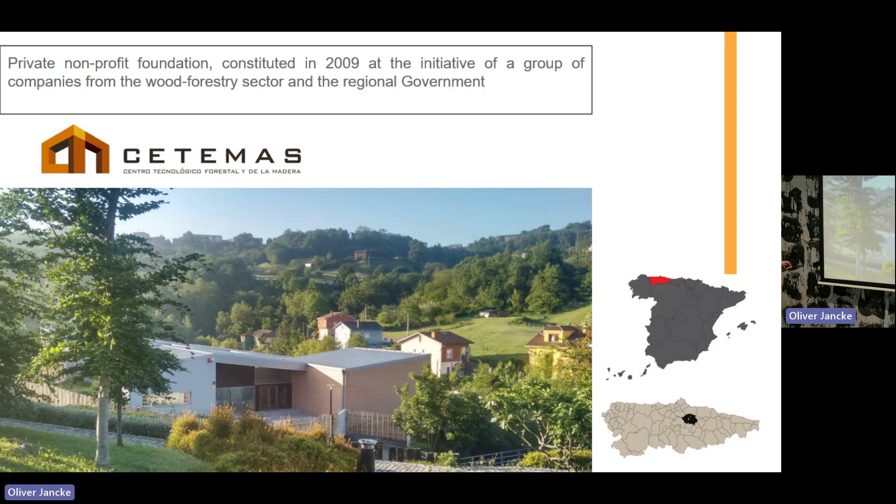We are a private and non-profit foundation created in 2009 under the initiative of a group of important companies in the forest and wood sector in Asturias and other regions, and obviously under the support of the regional government of Asturias.

We are around 22 people with different professional profiles. We have forest engineers, chemists, biologists, chemical engineers, and every year we have between 2 and 6 students of different levels.

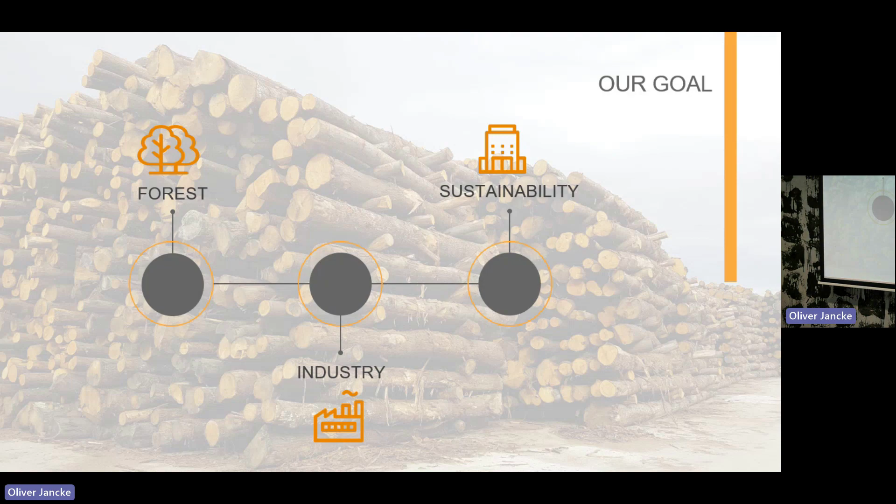Obviously we work across the whole value chain from the forest to the final product. We work, for example, in forest genetics and in the characterization of wooden windows, so we cover all the value chain.

We can divide our work into 5 main areas or work lines: sustainable forest management, forest planning, geomatics, sustainable materials and construction, and bioproducts.

In sustainable forest management and forest planning, we work with different species present in our region and in the north of Spain in general, like Pinus pinaster, Pinus radiata, and of course the very important hardwood species for us, like chestnut or oak.

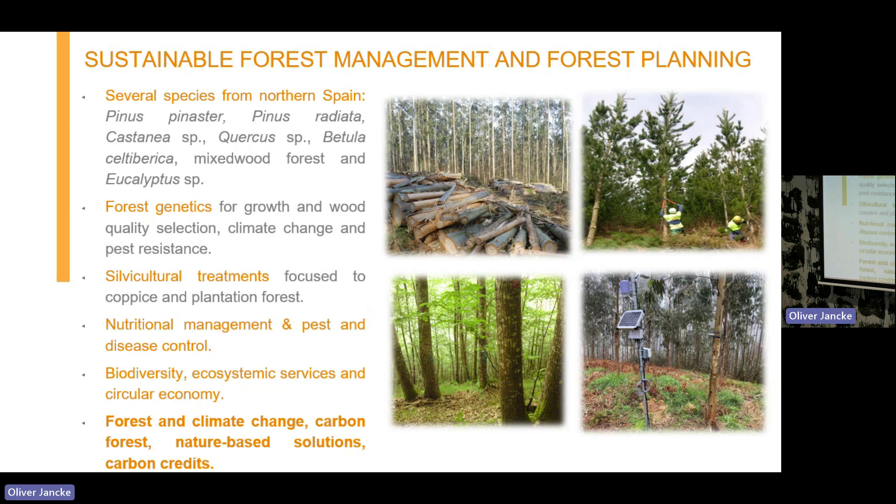We work in forest genetics and in research and innovation in silvicultural treatments, in the implementation of new technologies, forest management, machinery, and the evaluation and optimization of forest works, and obviously in the relationship between the forest and all the carbon issues that are so important nowadays.

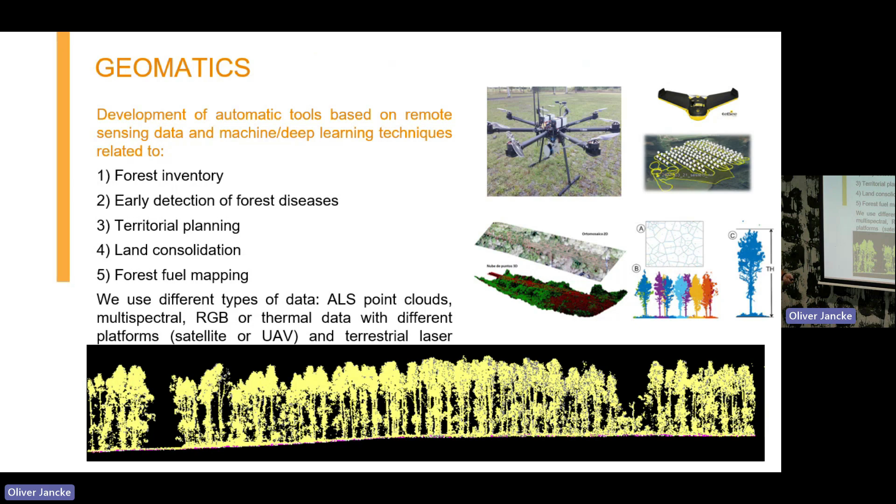In the area of geomatics, we have different types of drones with different technologies that we use to develop automatic tools based on remote sensing for forest inventory, detection of forest disease, territorial planning, land consolidation, and forest fuel mapping. This is a very important line for us at CETEMAS, and one of our main works.

Related to sustainable materials and construction is the theme more related to Innovagood, of course. It's the area where I am working. I can divide it into structural timber and construction, and wood technology.

In the first one, we work on physical and mechanical characterization of any type of wood-based product. We use NDT technologies and dynamic analysis, even in industrial products and structures, for on-site and industrial quality control.

We develop projects to improve industrial processes and optimize the capacity of companies in the first and second transformation of the wood industry, and we do inspection and diagnosis of timber structures.

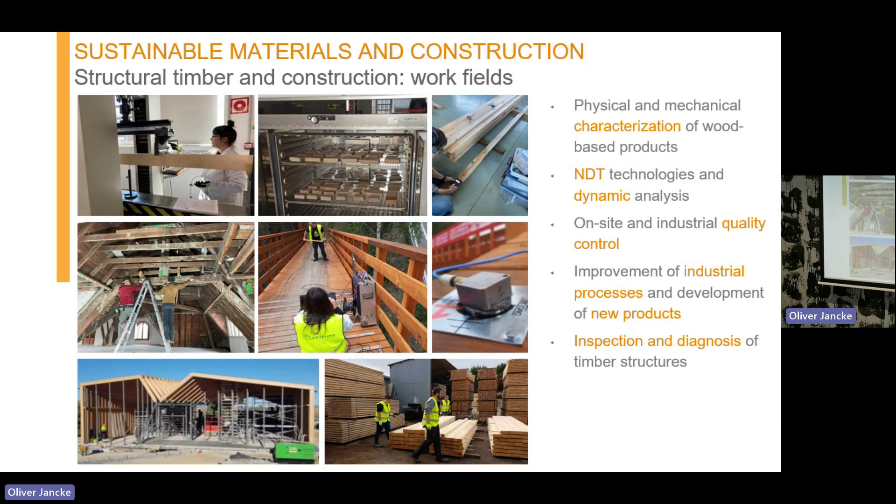In the last few years, we have been actively working on the inspection, evaluation, and inclusion of new technologies in the inspection of wooden heritage in Spain. In Asturias, this is very important for us.

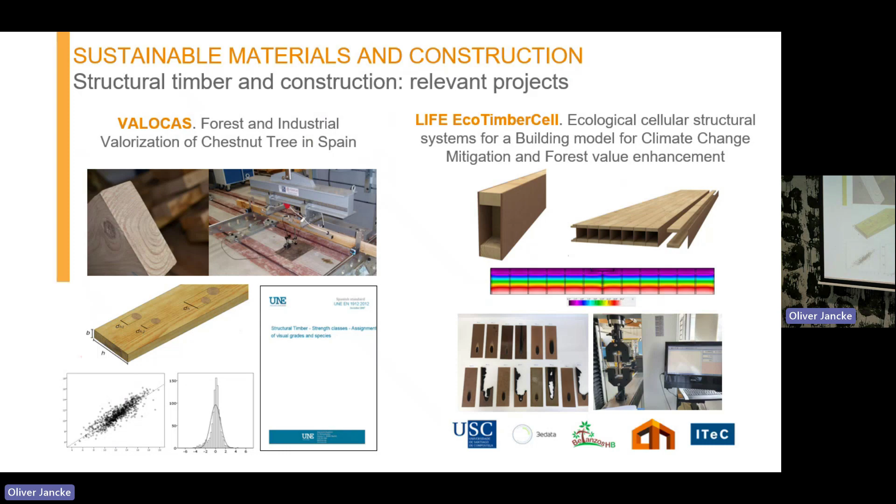Well, two examples of two projects in this area. For example, we did maybe 10 years ago the mechanical characterization of Spanish sawn chestnut timber and its inclusion in the standard 1912. More recently, we finished a project with other partners on the development of new structural systems and the evaluation of mechanical properties, thermal properties, behavior in fire situations, and the behavior of different kinds of adhesives, trying to look for a bioadhesive, so different approaches.

And in the field of wood technology, we work on a lot of different tests and approaches, the physical, chemical, and functional properties of coatings, treatments, fire behavior, durability, tannin extraction, all of these things. Obviously, with adhesives in the carpentry industry.

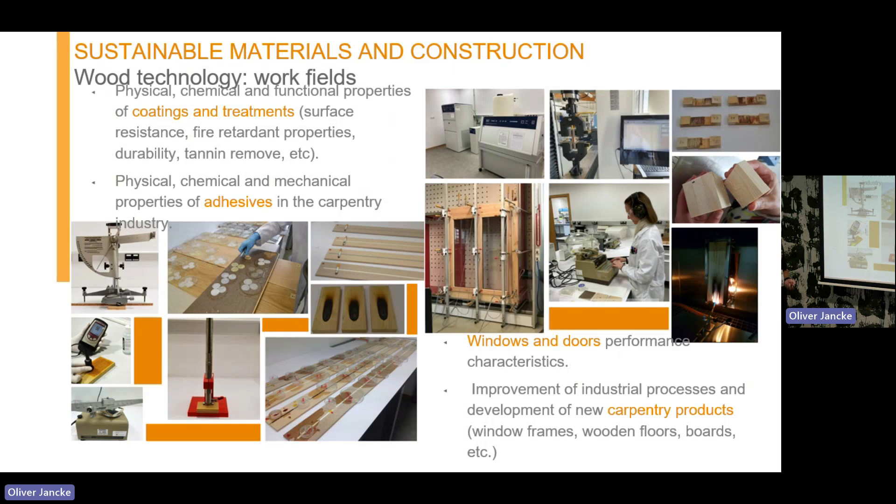We evaluate and work together with companies on window and door performance, the improvement of thermal and physical performance of wooden windows and mixed windows, and the improvement of industrial processes and development of new carpentry products. Especially, we work in wooden flooring and windows.

In flooring, for example, with the project of thermal efficiency improvement study of high quality wood flooring for radiant floor. Another example is the development of sustainable coatings and treatments for the surface resistance and aesthetics of flooring.

And in terms of windows, we work with a high number of companies in the north of Spain, evaluating all of the important parameters in a window like permeability, thermal behavior, all these things.

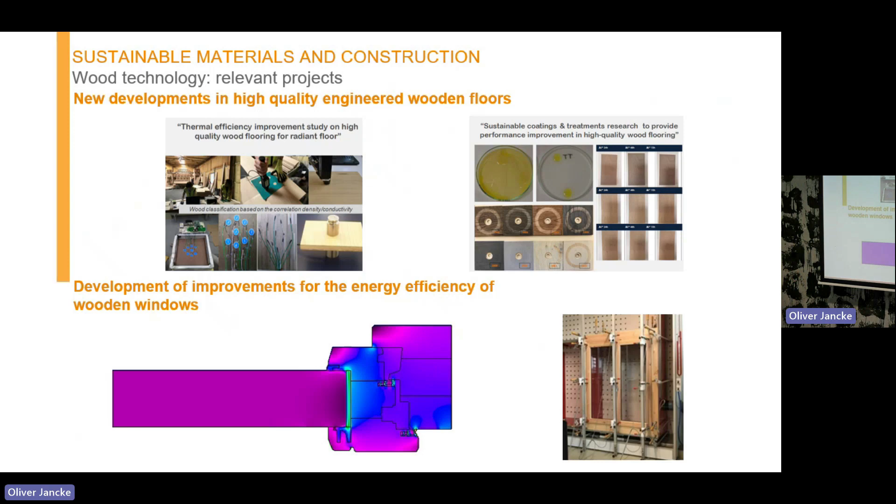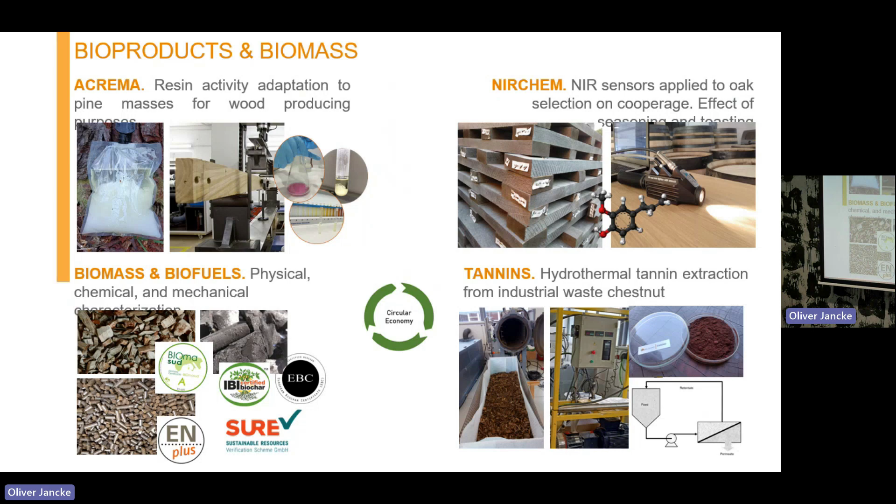The characterization in a physical, chemical, and mechanical way of biofuels, and the extraction of tannins from chestnut waste or from chestnut sound timber. This is a very potential and commercial way to use in other sectors, and it's a very important future line.

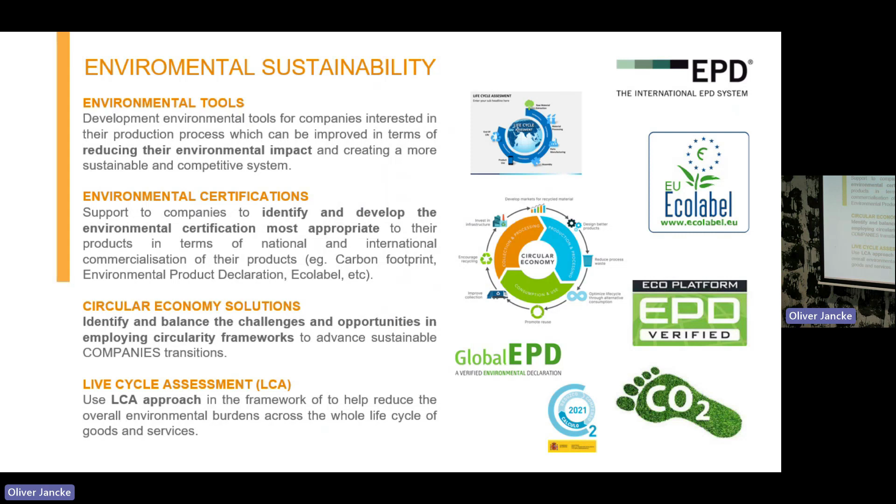We participate in or develop projects at the regional, national, and international level. We work a lot in these regional and national calls because we work more in applied research with companies of the sector. We have a somewhat complicated industrial environment because we have very small, old-fashioned, conservative companies, so innovation is not easy for them.

You have to be the tool to connect the innovation and research to this small company. So we are working on a lot of small projects with small companies to try to help them to advance. We have projects...

So we have projects, and we also have a line of technological services. All of our facilities and testing equipment, we use in services to companies and professionals, universities and other research centers, clusters, public administration, and others.

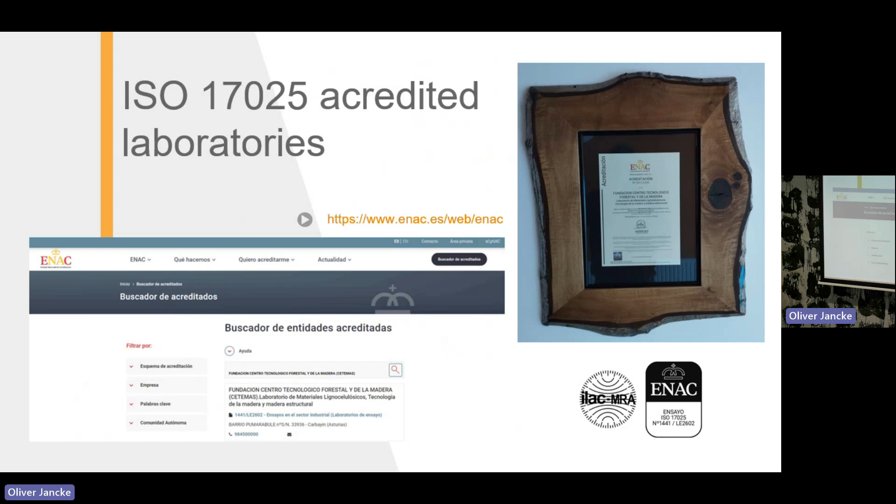We are accredited in a large number of tests, obviously under European standards. I think we are, in Spain, the center with the highest number of tests accredited by ENAC in wood product testing: sound timber, GluLam, CLT, boards, windows, all of this. Mostly, I think, the most basic wood products that can be tested. Well, this is all.